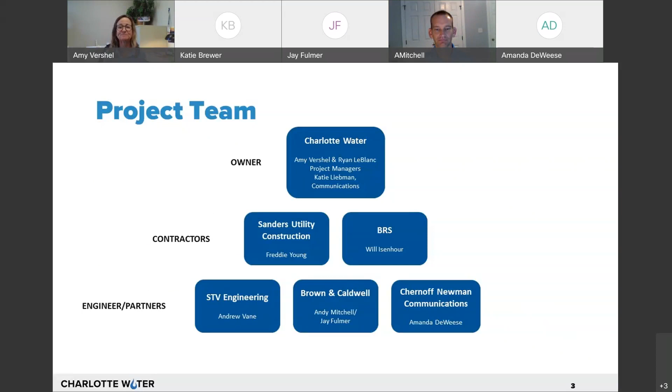So the overview of this project, why are we doing this project? A lot of the water system in Hidden Valley was constructed back in the 1960s. And what was acceptable then is not necessarily what we want for our customers today. The Hidden Valley community has had lower water pressure. There's a range of acceptable water pressures. Hidden Valley happens to be on the low end.

What you will see coming up in order to address this concern, we're going to be putting in a new water pipe and replacing some valves. Once those are all in place and we're ready to more or less flip the switch, that will increase the pressure to the customers in the Hidden Valley neighborhood. We'll call it approximately 20 pounds per square inch, that's PSI, about 50% more pressure than customers see today.

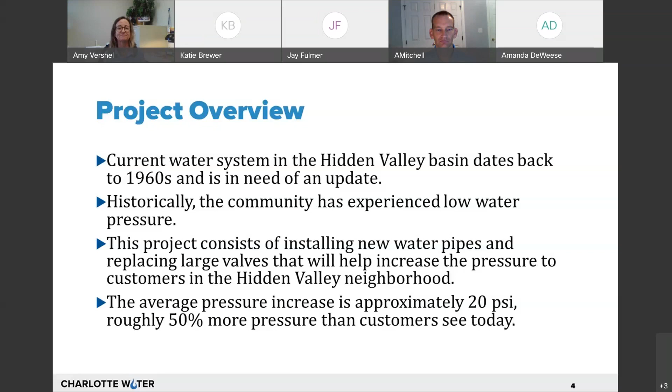With that, what we will be putting in is about 15,000 feet, so close to 3 miles of new water main. It mostly will be in Tom Hunter Road, but we will actually be starting on West Sugar Creek Road, crossing under 85 and running end to end on Tom Hunter Road all the way to North Tryon Street. So that's most of the construction. Also, there are 12 valves that we're going to be replacing just at intersections along the border of Hidden Valley. With that, I'll turn it over to Drew.

Hi, I'm Drew Vane. I'm with STV Engineering here in Charlotte. This shows a map graphically of where the water lines are going to go. The line on the left, as Amy said, follows West Sugar Creek Road. That's going to be 12-inch and 16-inch, tunnel under 85, along Tom Hunter and end at North Tryon, where the tie-in will be. Also, as part of redundancy, there'll be a 12-inch water line from the Mineral Springs area that will cross under 85 along the I-85 Equipment Drive service road and tie in again at North Tryon Street.

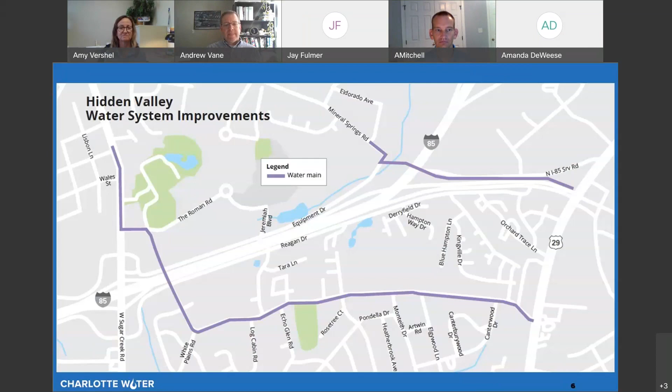In addition, as Amy said, to isolate this new pressure zone from the surrounding pressure zones, the contractor is going to cut in new valves throughout the Hidden Valley neighborhoods. Many of the valves, as Amy said, are old. They don't close all the way, and so this will ensure that a good system is set up and new valves are put in so that the new pressure zone can be isolated.

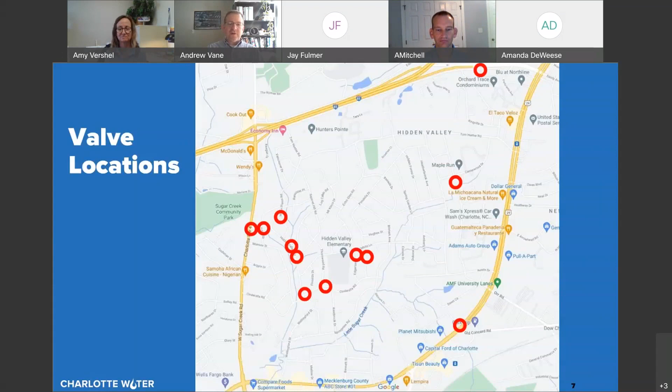This is a list of the locations where those valves are going. You may recognize your street or these intersections may be familiar to you. So we wanted to provide this so you can kind of see and know what to expect in these intersections when the valves get put in.

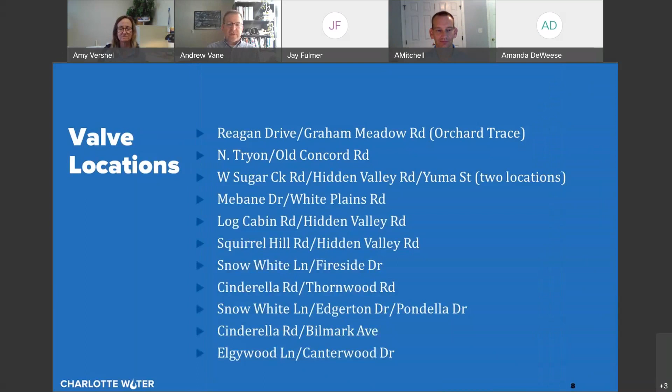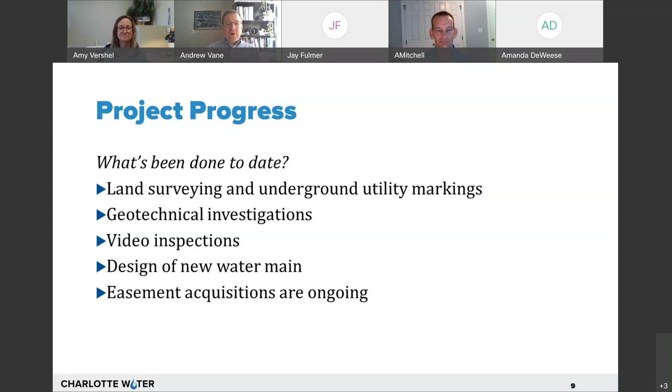So this project isn't starting today. It's been going on for some time, and we've got a lot accomplished already, mainly behind the scenes work. We've gotten the field work complete, a lot of the surveying, geotechnical investigations, locating underground utilities that are already there so we don't have conflicts. We've got the design to a point where it can move to construction, and property acquisition is underway as well. To talk a little bit about property acquisition, a company called TELICS is the main property coordinator.

They're handling contacts with residents and coordinating the appraisals and agreements and sign-offs. So at this point in the project, if Charlotte Water requires an easement from you, or because we need to acquire an easement on your property, you probably have already been contacted. So the majority of the projects are in public road right-of-way, so there's not a lot of easements required, but this is a part of the project that's ongoing.

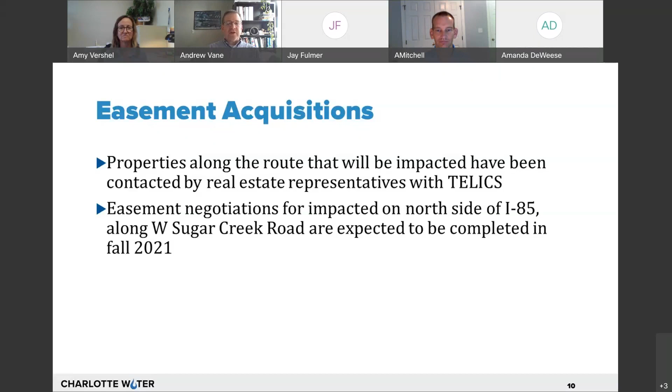So I'd like to talk a little bit about construction now and what you'd expect to see out there in your neighborhood. We'll start with a schedule of a timeline. Fall 2021 is where the Tom Hunter work will really start. It'll mainly start at the eastern end at North Tryon, I believe, working its way west. And then that's expected to take 18 months to complete that water line. And then the valve work is expected to start next year in the spring over a 4-month period.

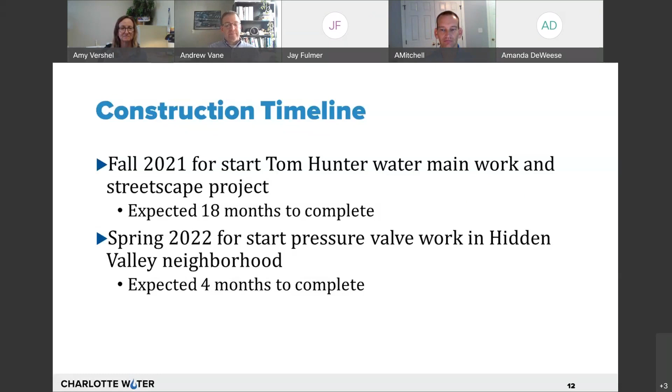So what will the construction look like? Generally, the contractor will come in, he'll trim some of the trees back, do minor clearing, he'll start mobilizing equipment to the area. It's very important that he establish a safe work zone with barriers and cones to protect the workers during construction. There'll be traffic control measures set up, possible detours as needed, and then you'll see the contractor basically digging up the pavement, putting the pipe in, backfilling, and then eventually restoring the area. At the end of each section, the contractor will fill the pipes, flush them, chlorinate them, and put them into service.

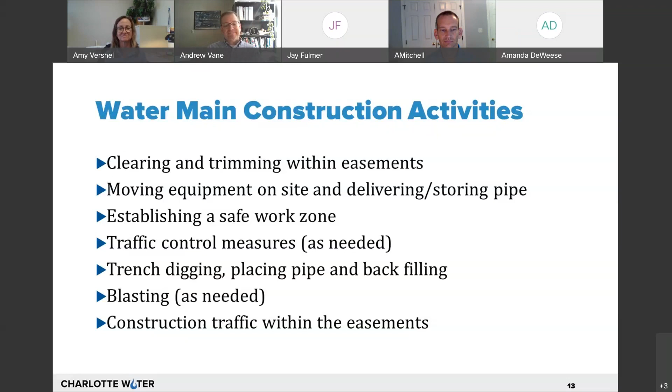There will be some water service interruptions, and when these are planned, they'll be communicated 72 hours in advance so that residents know. There'll probably be door hangers, maybe even a knock on the door to let you know there's going to be a water shutdown. There is a chance there may be unplanned outages if there's an emergency, and those will take high precedence and be repaired as soon as possible. If you do see or experience cloudy or discolored water in your home, then you should just run your faucets for up to 15 minutes. If it's still not clean, then call 311 and mention a water emergency, and Charlotte Water will take care of it.

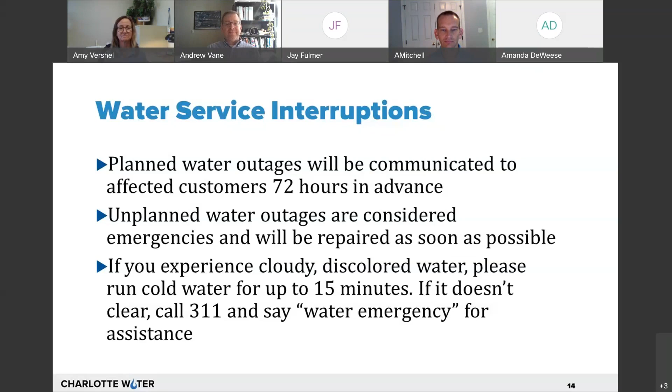So we don't anticipate rock on this project. If there is solid rock that's buried in the trench that the contractor has to remove, there is a possibility he may have to do blasting. So it would be a small controlled blast. There would be seismic monitors set up around the blast area, and impacted property owners in the area would have an opportunity for a pre-blast survey of their home and their property and structures prior to the blasting taking place.

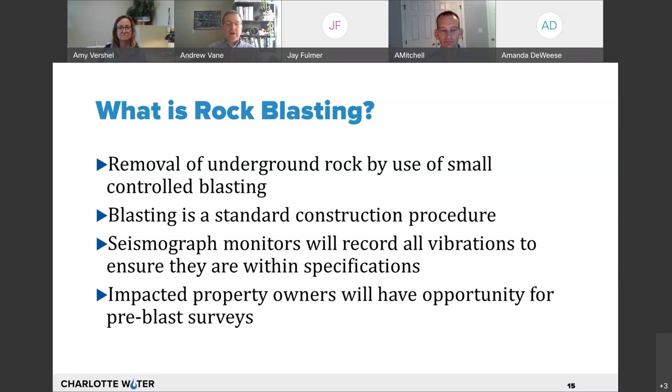So this is a graphic showing sort of the process that blasting takes. The contractor has excavated down and noticed the rock is in the way and he can't put the water line in. So they will drill holes in the rock, place small dynamite charges, repack the dirt into the hole, cover with a blasting mat to protect everything, and then detonate the charges. Normally, this allows the contractor not to explode the rock, but to fracture it with blasting so that it can be dug up mechanically in a safe way afterwards.

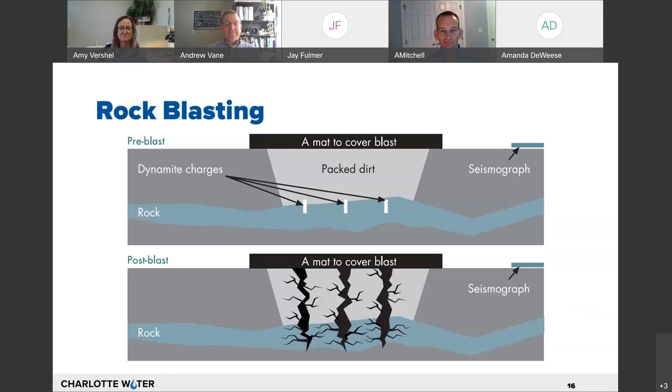One of the things we've done on this project is coordinate with other city departments, and it turns out CDOT is planning a streetscape project along Tom Hunter Road from about the Monteith intersection all the way to North Tryon. So this project will take place concurrently with the water main work. So there'll be additional storm drain put in, sidewalks, curb and gutter, bike lanes, and new paving and striping. So those two projects are coordinating with each other, and the same contractor is going to do both work.

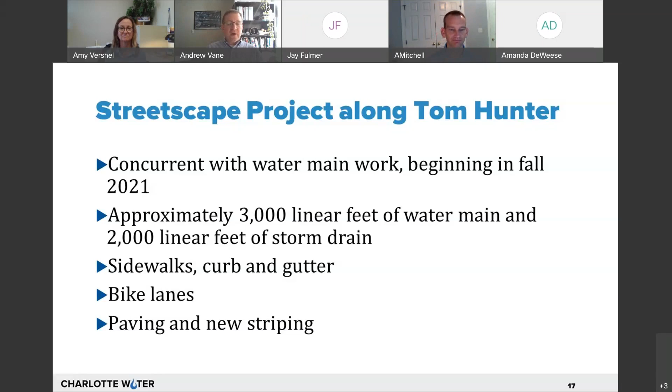Then to talk a little bit about the valve construction activities compared to the pipeline. In a similar way, the contractor will mobilize equipment to the intersection. They'll establish a safe work zone, cones and barriers, possibly detours if the work is in the middle of an intersection. They'll excavate, install the valves, and backfill. And then once they're done, the area will be paved and restored back. In some areas they may pave the whole lane, and in other areas it may be a patch in the neighborhood.

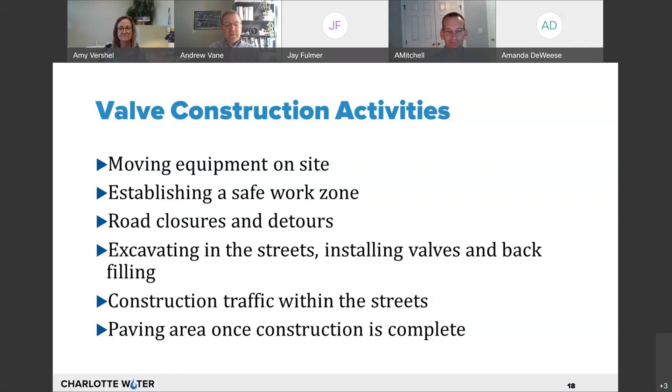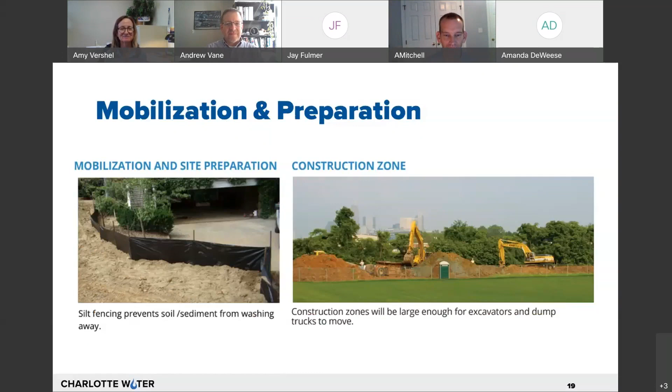Well, skipping ahead. So Drew has talked about describing the activities that will be coming up, but sometimes it's best to see an actual photo of what construction looks like. So we have some photos of various size construction projects. This one, you can see the size of equipment right in the street, close to houses. This one is a 6-inch water line. And it also has new pipes where they'd be going to each meter. We will not be going to each meter on this project, and the Hidden Valley water main is larger. It's 16 inches in diameter.

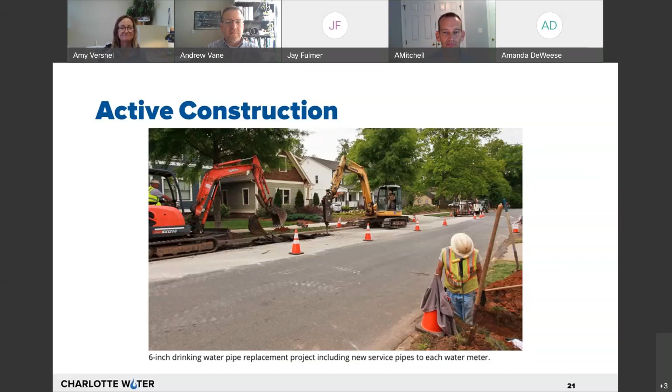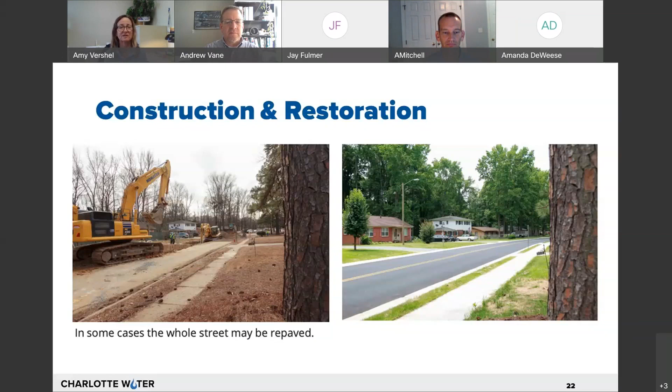This was a large project. You can see the size of the equipment is much larger. This, I believe, was about the same size as what we're putting in. We're putting in a 16-inch water main. This was actually a sewer project, but again, in the street, you can see the same house in both photos. The one picture is during construction. There's mud, it's messy, but afterwards, the street is repaved. There's a new sidewalk. Everything gets cleaned up and put back to at least as good as it looked before we started construction, and sometimes even better.

If we are in somebody's yard, it will be put back with grass seed. If we're in the road, sometimes it's a temporary patch, and then we come back and do the final paving later.

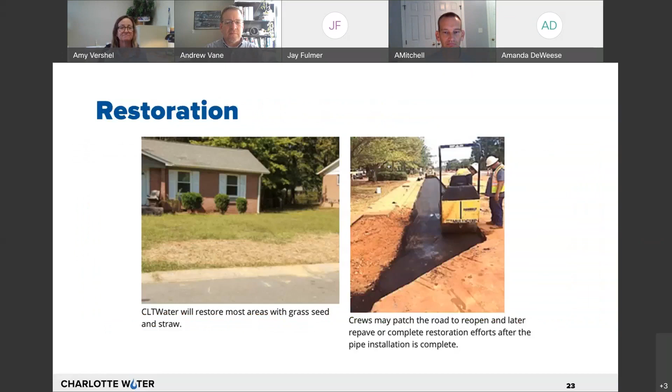Hi, this is Andy. I'm with Caldwell. We performed the original design for the project. I'm going to talk about the water pressure change a bit and some of the reasons behind the project. So once we complete construction, the valves Amy and Drew described earlier will be opened, and that'll give the customers an immediate increase in water pressure. As Drew notified you of previously, all residents and businesses will be notified well in advance of the valves being opened and any change in your pressure.

How much will that pressure increase? The increase will be about 20 psi, and that will only occur when all the work is complete and valves are opened, so that's about 50% more pressure than you see today.

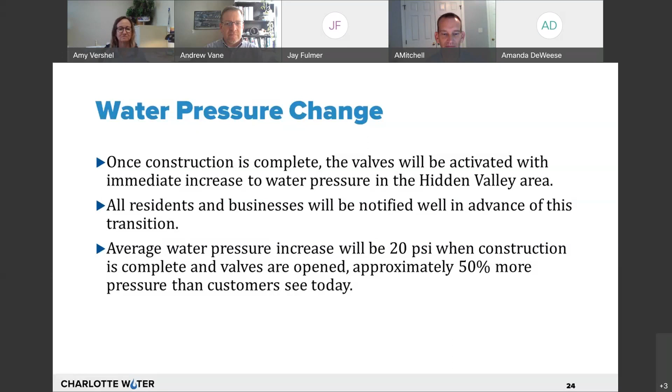Charlotte Water does have a contract with HomeServe. HomeServe is a policy that will last for a year. It will be free of charge to you, and that will cover any issues you may have with your interior plumbing or your exterior service line, and will include up to $500 of adjustments on your water bill in the event of a leak. That coverage will not cover any of your sewer lines, so only water. You will have the opportunity to renew that policy if you choose, but at your cost. There will be an information packet sent to you well in advance of that transition.

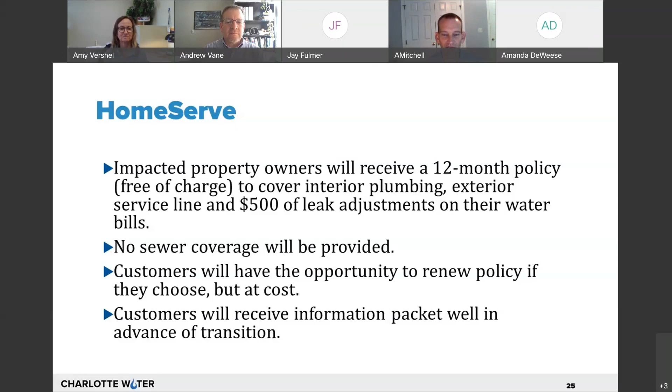So what happens next? We talked about easement acquisitions. That should be finishing soon. Sometime this fall, you'll see Sanders and BRS mobilizing their equipment for the water main work along Tom Hunter. Pre-blast surveys, only if they're needed, only if they find rock and need to blast, will happen shortly after mobilization. And then in the spring of '22, the contractor will mobilize and begin construction of the valves in the neighborhood. Again, that's spring of next year, 2022.